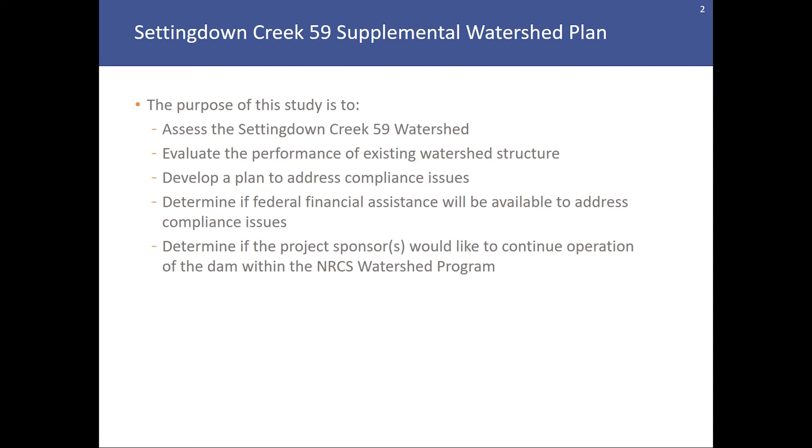This is the second public meeting held as part of the planning process for this dam. The purpose of the planning studies for the Settingdown Creek dams, including dam number 59, includes assessment of the watershed, evaluation of the existing structure's performance, development of plans to address compliance issues with the current dam, and determining if federal financial assistance will be available, as well as whether the project sponsor would like to continue operating the dam within the current NRCS watershed program.

As part of the planning study, a public participation plan is required to support the planning effort. The objective is to inform the public and watershed stakeholders of the planning effort. The planning study requires a series of public meetings. The first public meeting presentation included a brief history of the NRCS watershed program, a brief history of dam safety, considerations for dam design, operation, and maintenance, an overview of the Settingdown Creek watershed and specific dams included in this study, and solicitation of questions and comments based on scoping topics and identification of project opportunities and concerns.

This initial presentation was provided in August of 2020, but please note that it is also being reposted to Schnabel's YouTube channel to run concurrently with these second public meeting presentations. They will be available until early January for reviewing and comment.

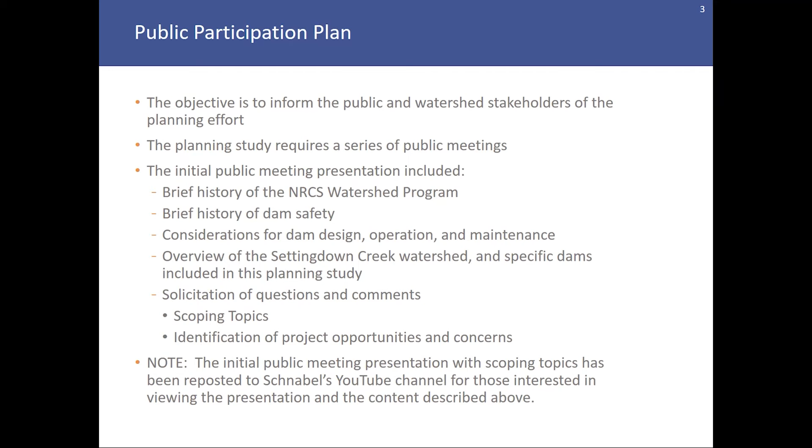This is the second presentation for this particular dam. In this presentation we will discuss the following topics: an overview of the Settingdown Creek watershed, the existing conditions associated with Settingdown Creek Dam number 59, and a discussion of rehabilitation alternatives under consideration for the dam.

At the end of the presentation, there will be an opportunity to click on a link to get to a Google form where questions and comments can be submitted by interested parties regarding the planning study for this dam.

Just a brief overview about the Settingdown Creek watershed. It is located in northern Forsyth County, Georgia. Settingdown Creek is a tributary of the Etowah River, which flows into the Coosa River near Rome, Georgia. The Settingdown Creek watershed contains over 34,000 acres of drainage area.

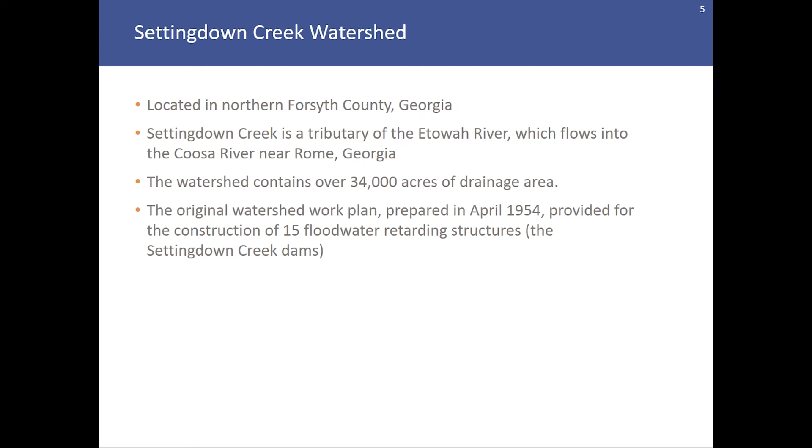The original watershed work plan, prepared in April 1954, provided for the construction of 15 floodwater retarding structures, also known as the Settingdown Creek dams. This study includes 6 of those structures, and this presentation focuses specifically on dam number 59.

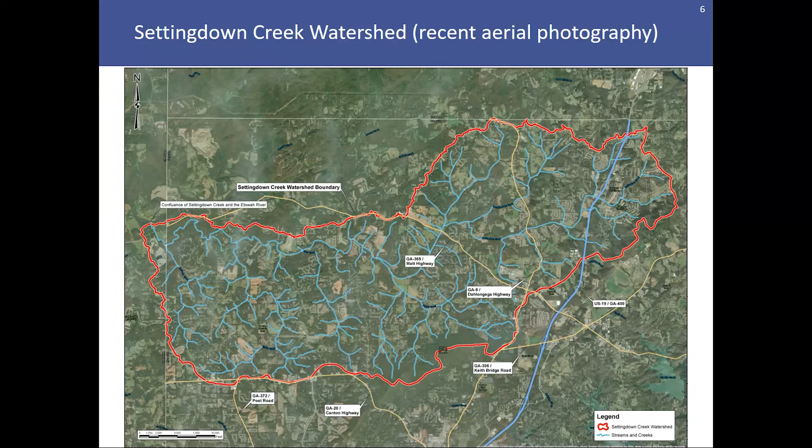This is aerial photography with the limits of the Settingdown Creek watershed shown in red. As you can see, there are some project area features, including US 19 or Georgia 400 noted near the right side of the view, as well as Keith Bridge Road, Dahlonega Highway, and Matt Highway, all major roadways in northern Forsyth providing context for where the Settingdown Creek watershed and dams are located.

As a reminder from the initial public meeting, the focal points of this analysis and study associated with the watershed are an analysis of the upstream areas, including flooding and additional storage capacity, evaluation of downstream areas for flooding associated with frequency storm events, as well as the breach zone were the dam to fail catastrophically. Also, the hydraulic capacity of the existing spillway outlet works was assessed for various storm events, including large storm events required by both the state of Georgia and the federal government.

The study will also include an evaluation of the economic and social benefits the dam currently provides, as well as an environmental assessment to identify potential species of note, wetlands and/or jurisdictional waters in the vicinity of the dams that would need to be considered during any rehabilitation. Finally, a cultural resources study has been performed to determine whether or not there are any items of historical significance associated with the dams prior to any rehabilitation.

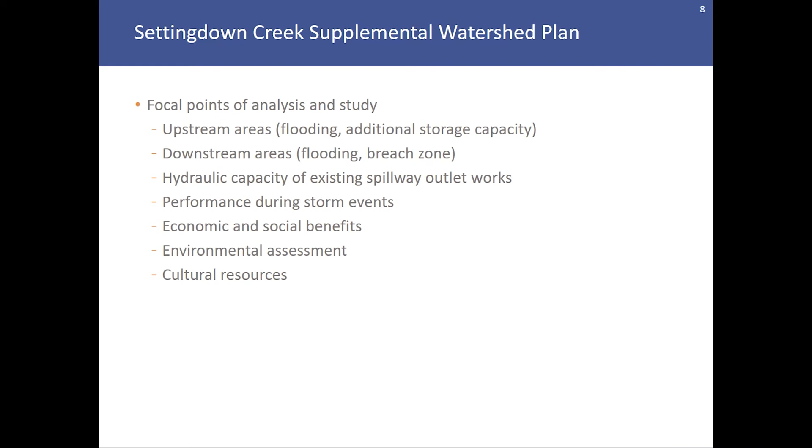Specifically talking about Settingdown Creek Dam number 59, the dam meets Georgia Safe Dam Program criteria to be considered a Category 1 high hazard dam. This means that failure or improper operation of the dam would likely result in the loss of human life.

The dam needs an operating permit from the SDP and currently does not have one. Previous assessments of this dam indicate that it does not comply with current SDP rules and regulations, and the dam is not exempt from these rules and regulations.

A purpose of the planning study is to determine if federal assistance will be available to bring the dam into compliance with current dam safety requirements. The Georgia Safe Dams Program is fully aware of this dam, its classification or pending classification as a high hazard dam, and that the dam is being studied by the planning team.

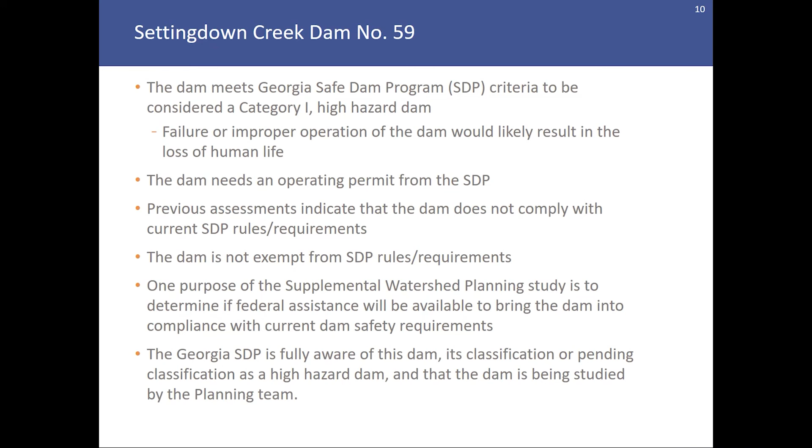Some original design features for dam number 59 include that it was not originally designed as a high hazard dam. The purpose of the dam was originally flood mitigation, and an anticipated secondary purpose was sediment accumulation and storage. The dam was originally designed and constructed with a reinforced concrete principal spillway, which consists of a riser structure in the lake.

The spillway includes a pipe or conduit through the earthen embankment to convey water from the lake downstream to the outlet channel or creek. The dam also includes a vegetated earthen auxiliary spillway, or emergency spillway channel, that would flow in the event of increased flows into the dam, so water would go around the dam and not over it, which could lead to its failure.

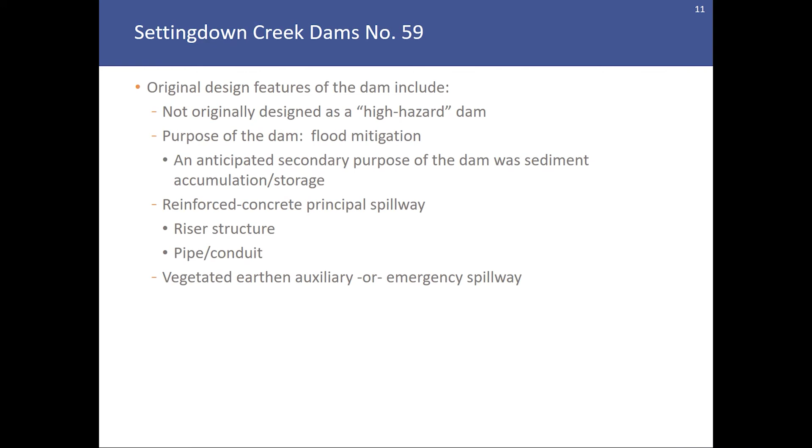Settingdown Creek Dam number 59 is located adjacent to the Hampton Golf Club, south of Glen Haven Drive. It was built in 1954, making it approximately 66 years old. The dam is currently 33 feet tall, with a drainage area of just about 1.8 square miles.

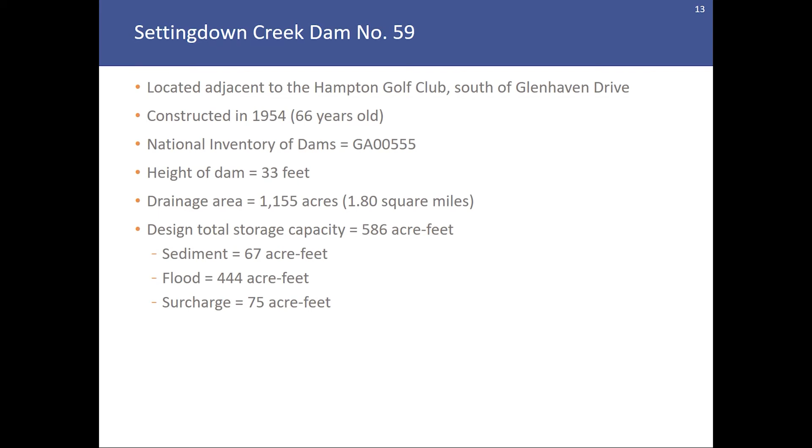The design storage capacity of the dam was 586 acre-feet, and that includes considerations for sediment accumulation, flood control, and surcharge above the auxiliary spillway.

Here's a 1956 aerial photo taken recently after the construction of the dam. As you can see, there's not much development. The golf course has not been constructed, nor the residential communities surrounding the lake.

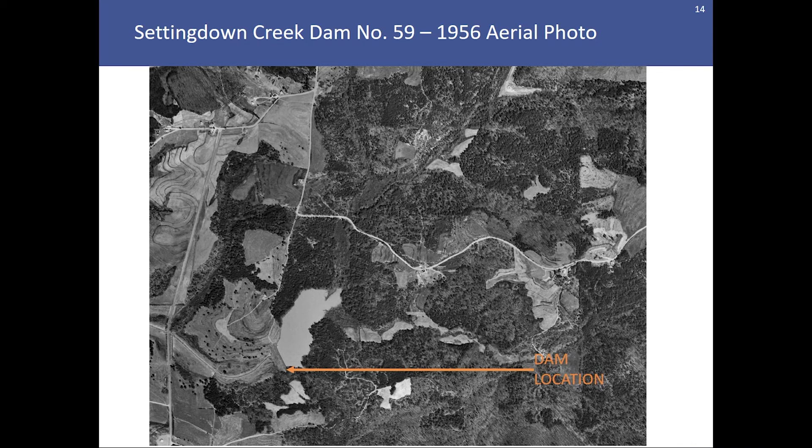Here's a more recent aerial photo that shows portions of the golf course and residential development around the lake. Also of note is the existence of a water treatment center just to the south of the dam. The dam also has a cart path associated with the golf course that traverses the crest of the dam and allows for crossing of the creek and lake from one side to the other.

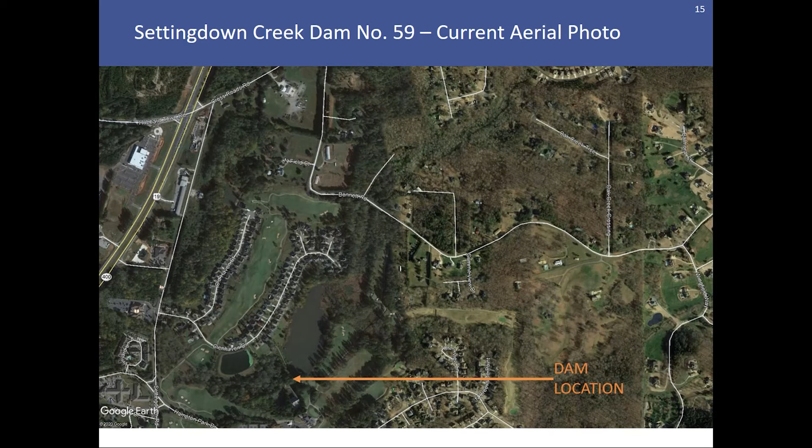This is an aerial photo taken to support a survey performed this past 2020 of the dam. You'll note that the dam was recently cleared prior to this photo, and the light brown or yellow areas on the embankment are places where straw and erosion control matting have been placed over the disturbed ground that resulted from the clearing of the dam.

The dam previously was covered in trees and other inappropriate vegetation, and the sponsoring local organization arranged to have the dam cleared in advance of these studies. As you can see, the lake is at the bottom of the screen.

Typically with dam engineering, this is the orientation of a dam that we follow. So as we move forward, you'll note that some of the maps with respect to the dam include the lake at the bottom with flow going up toward the top of the page. So upstream would be in the downward direction, and downstream would be at the top of the page in these cases.

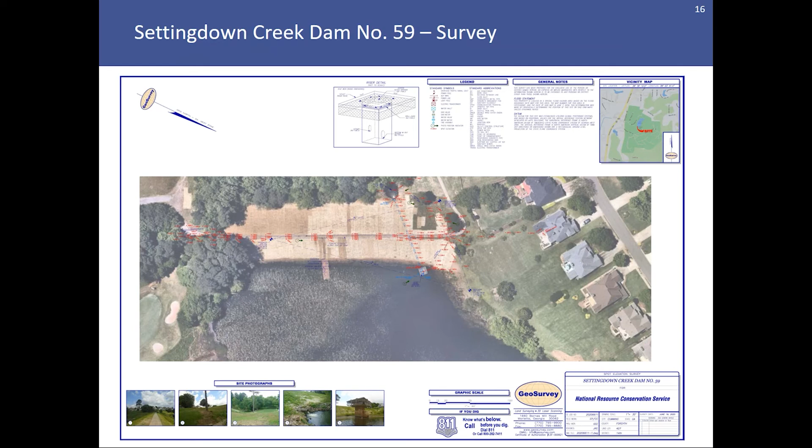This is a site plan using GIS topographic contour information. As you can see, it shows the location of the principal spillway, as well as the concrete path along the top of the dam. The water treatment facility is located to the left of this view, and you can see several residential properties located along the right side. The auxiliary spillway is located near the right side of this view, with a general alignment of that spillway channel also shown on the right side of this page.

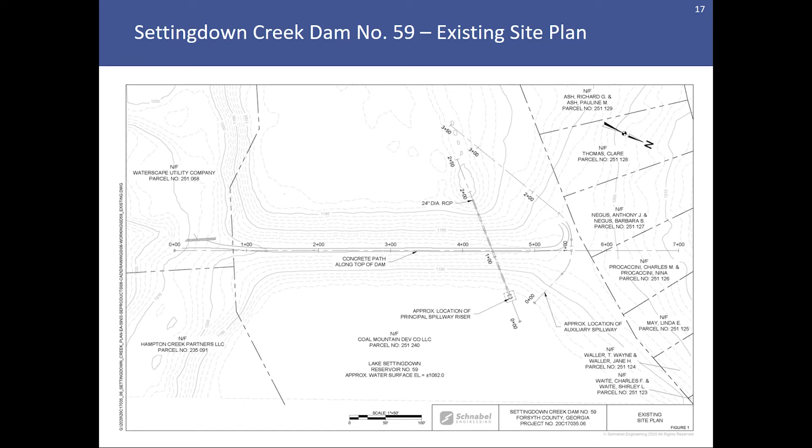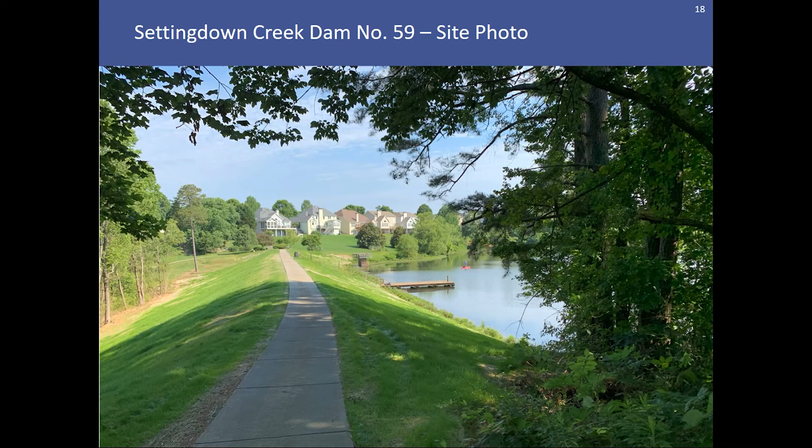Here's a photograph taken a few months ago of the dam after it's been cleared and the grass is reestablished. You can see in the background the residential homes. You can also see the concrete riser structure, the crest of the dam with the golf cart path going across it, and the upstream slope. There's also a dock that's been constructed on the upstream slope of the dam.

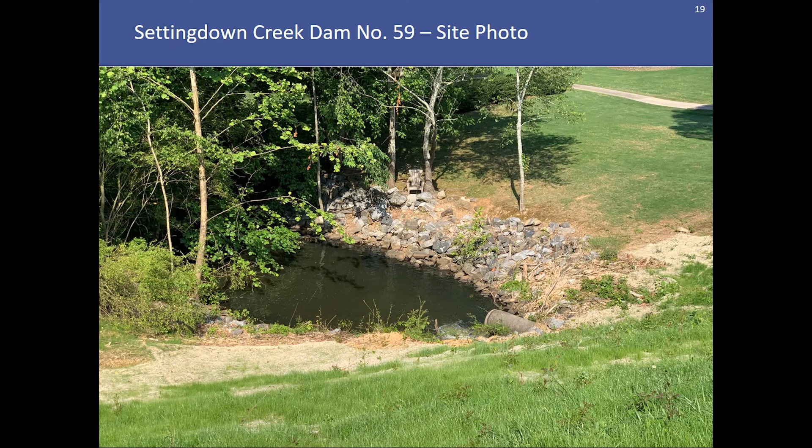The principal spillway conduit is indicated along with the plunge pool where water discharges, and the downstream slope.

As part of the planning study, an environmental survey has been performed for the dam and adjacent areas. During this survey, no protected species were identified. Some invasive species, predominantly Chinese privet, a vegetative species, were identified as indicated on the aquatic resource survey map shown on this slide.

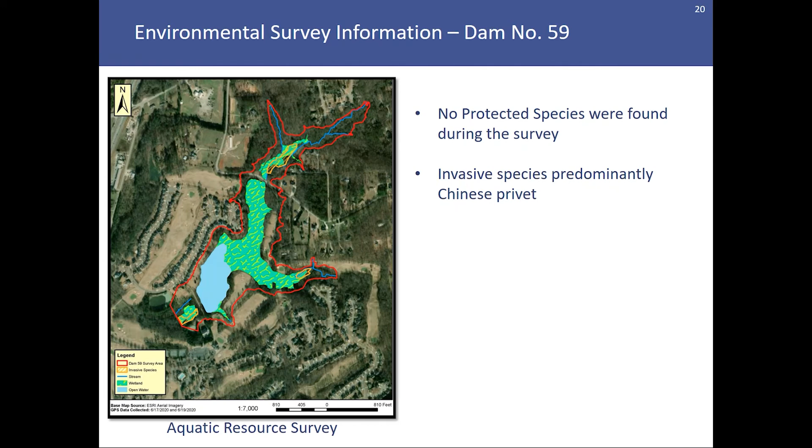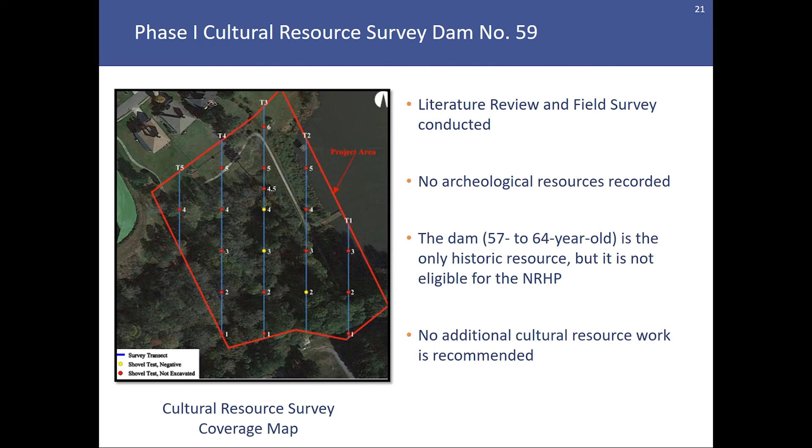Also, a Phase 1 cultural resources survey was performed for dam number 59. The survey included a literature review as well as field activities and shovel tests. No archaeological resources were recorded on this site. The dam, being in the range of 57 to 64 years old, is really the only historic resource, but it is not eligible for the National Register of Historic Places. No additional cultural resource work has been recommended by the team that performed the cultural resources survey for this dam.

Here is a breach inundation map and identification of downstream hazards. As indicated previously, this dam does meet the requirements as a Category 1 or high hazard dam, which means that if the dam were to fail, loss of life would be imminent or likely. The dam breach inundation limits shown on this map were derived based on a sunny day breach with the water surface at the top of the dam, which is a common and required configuration for a dam breach for both the Georgia Safe Dams program as well as the NRCS.

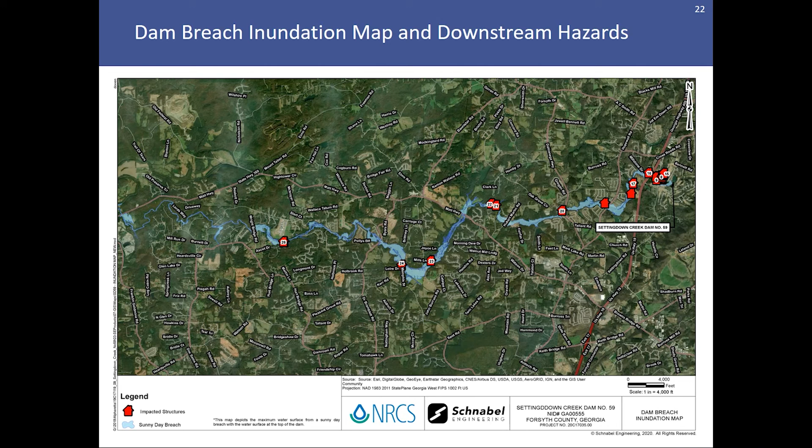This is a downstream flood analysis map that was developed by Schnabel. This particular map includes consideration for all areas within the Settingdown Creek watershed upstream of John Burris Road. The limits shown on this map indicate areas that would be flooded during both the 100-year and 500-year 24-hour storm events. Downstream flood analysis is an important part of the planning study as it allows the planning team to identify and quantify the benefits provided by the existing dam.

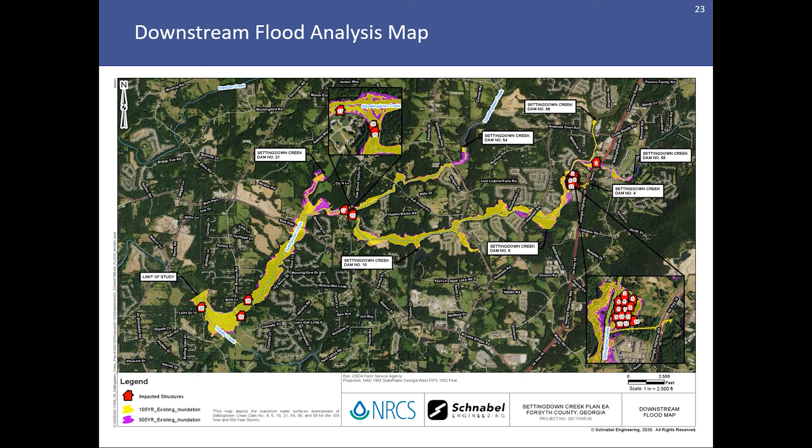This map indicates the upstream flood limits of the lake. Several storm events have been run through the lake and spillway outlet works, and in doing so, the planning team has been able to identify the water surface elevations associated with those events.

As you can see on the left side of this view, there's a legend that indicates the normal pool elevation of the lake, the elevations associated with the auxiliary spillway and dam crest, and also the storm event elevations—the water surface elevations associated with several storm events, including the 100-year storm, the 500-year storm, the Safe Dam Program Design Storm, which is currently the 1/3 probable maximum precipitation storm event, and the Freeboard Hydrograph Storm, which is the NRCS Design Storm event. The FBH, or Freeboard Hydrograph, represents 100% of the probable maximum precipitation in this area, which is generally around 30 to 32 inches of rain in a 6-hour period.

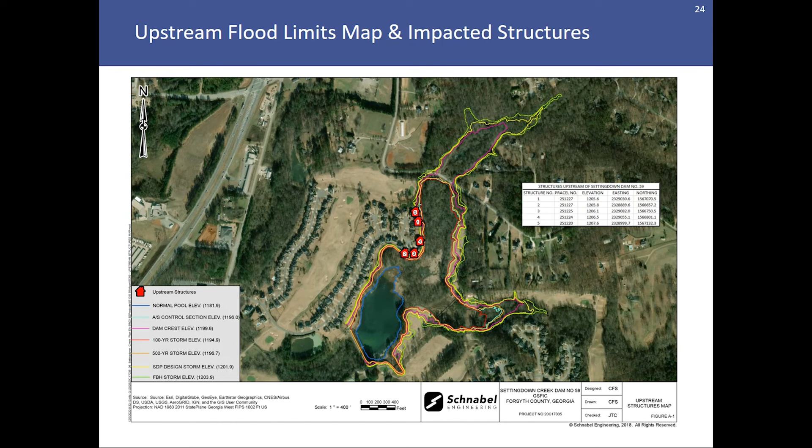Existing dam deficiencies: the dam was recently cleared during the summer of 2020. Previously, there was a lot of inappropriate vegetation and trees growing on the dam, and those trees and vegetation have since been removed, and the ground has been re-stabilized with an appropriate turf grass.

An underwater inspection of the riser structure by commercial divers concluded that portions of the slide gate assembly associated with the riser structure are worn and/or corroded. Portions of the riser concrete are cracked and/or spalled, which is not surprising given the age of the structure. A closed circuit television camera inspection of the principal spillway conduit is scheduled to be performed, and we are awaiting the results of that inspection.

Existing hydraulic deficiencies with the dam: based on Georgia Safe Dams Program criteria, the dam overtops by 1 foot during the design storm, which is not good, and also the auxiliary spillway breaches, meaning there would be enough flow that the earth spillway would erode to the point that the entire dam would fail.

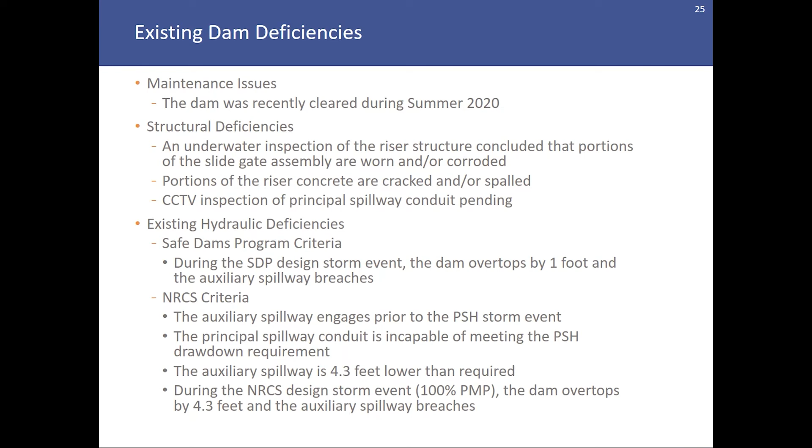The NRCS criteria that were assessed show the auxiliary spillway engages prior to the PSH storm event, the principal spillway hydrograph storm event. The principal spillway conduit is incapable of meeting the PSH drawdown requirement, and the auxiliary spillway is about 4.3 feet lower than required by NRCS requirements. During the NRCS design storm event, which is 100% of the PMP, the dam overtops by 4.3 feet and the auxiliary spillway breaches.

In order to address the compliance issues with the dam, the planning team has worked up several rehabilitation alternatives for consideration. The majority of the alternatives will be based on federal criteria, although we have looked at rehabilitating the dam to meet state criteria, which are a little less stringent than federal criteria.

The future without project, or no action, alternative would be instituted assuming that no federal financing would be available for the rehabilitation. As such, the dam rehabilitation would be paid for using state funding and would be performed such that the dam would be rehabilitated to meet Georgia Safe Dam's program criteria for a high hazard dam.

Another alternative being considered and evaluated is decommissioning of the dam. This involves removal of the earthen embankment, stabilization of the excavated channel and resulting lake bed, and could also require consideration for flood proofing or relocating downstream hazards. As stated earlier, the dam currently provides a level of flood protection to downstream areas, and removal of the dam will impact the benefits it provides.

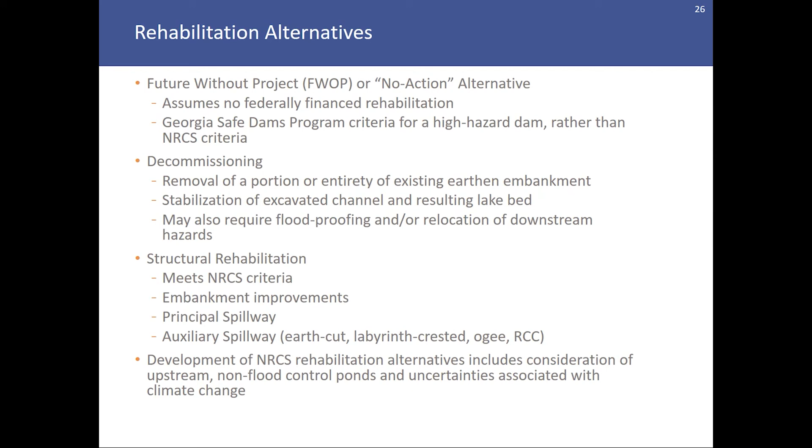The development of NRCS rehabilitation alternatives also includes consideration of ponds upstream of the dams that may not be designed to the same criteria as a flood control dam. The alternatives have also been developed considering the uncertainties associated with climate change and what rainfall events will look like over the next 50 to 100 years in this area.

The first alternative is the no action, or federal without project, alternative. This is the alternative that would bring the dam into compliance with state criteria. It would involve raising the crest of the dam to provide adequate freeboard during the design storm event, regrading the upstream and downstream slopes to a 3-to-1 slope to improve stability and maintenance, construction of a riprap lined wave berm along the upstream slope, and decommissioning of the existing auxiliary spillway by closing it off and making it part of the new embankment.

This alternative would also include construction of a new principal spillway riser structure, installation of a new principal spillway conduit, and construction of a riprap lined plunge pool at the downstream end of the conduit.

Finally, the auxiliary spillway for this dam would involve a reinforced concrete labyrinth crested chute spillway. The spillway would have a total width of 60 feet, composed of two 30-foot cycles, and would be constructed over the existing embankment. We've attempted to give consideration to maintaining access to both sides of the spillway from the dam crest.

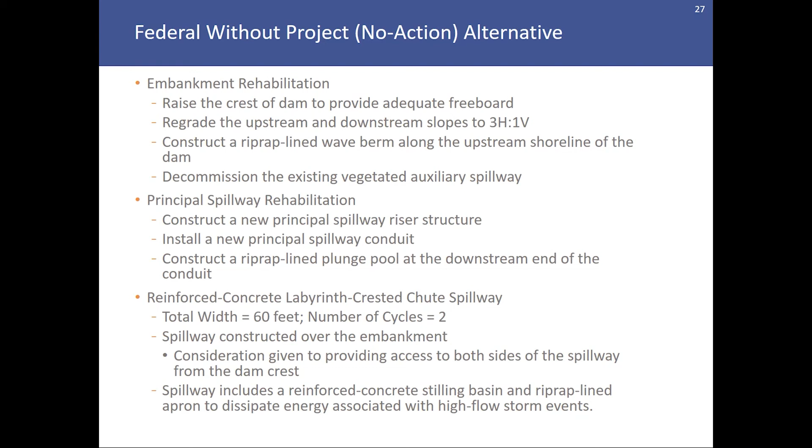The spillway would also include a reinforced concrete stilling basin and riprap lined apron to dissipate energy associated with high flow storm events.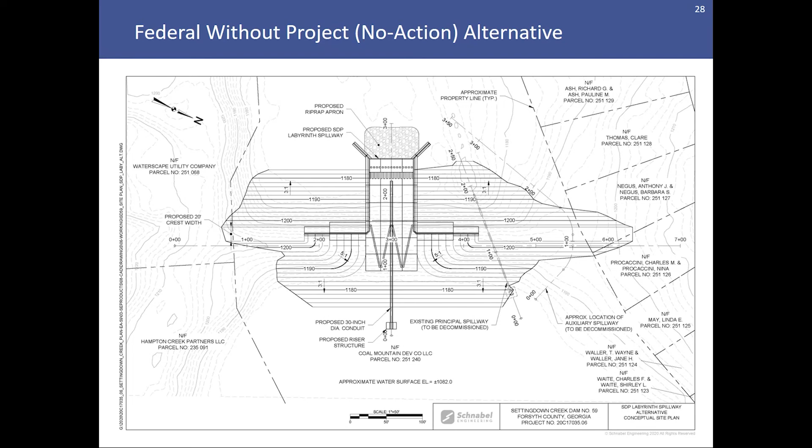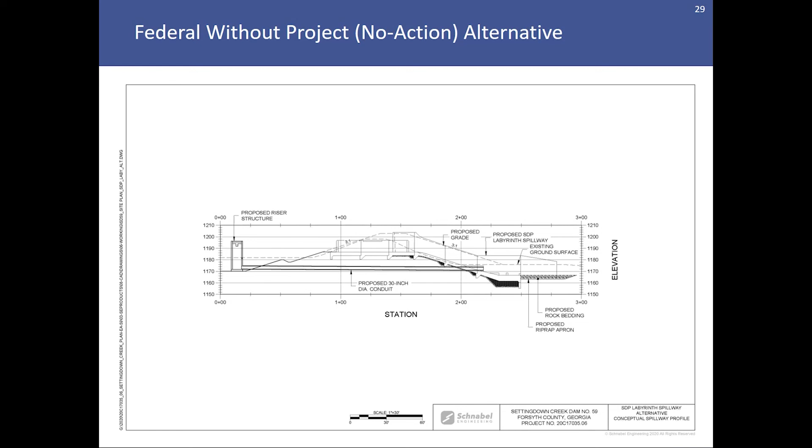The profile view of the labyrinth spillway. In this configuration, we are proposing to build the new pipe and riser along the same alignment as the concrete spillway. The pipe would discharge base flows and any flows related to very frequent storm events into the stilling basin, as indicated here.

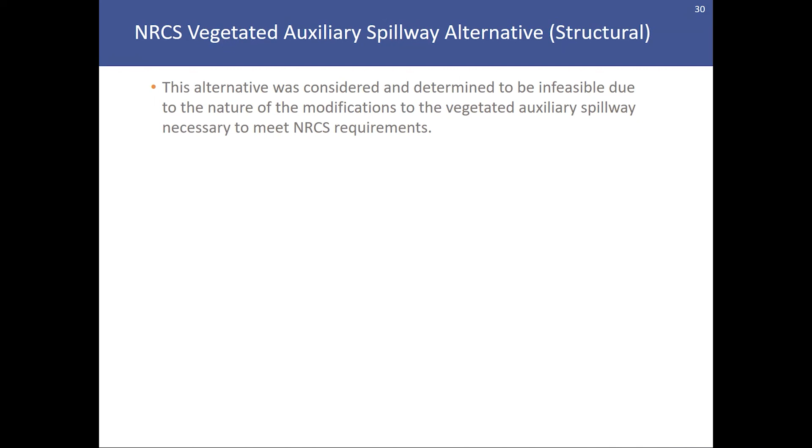Regarding the NRCS vegetated auxiliary spillway alternative, we considered this option but determined it to be infeasible due to the nature of the modifications required. Typically, the NRCS requires that the auxiliary spillway be raised, and the materials evaluated were relatively erodible. So while consideration was given to this alternative, it was determined to not be feasible on its own.

As part of the planning study, we also have to look at a decommissioning alternative, which would involve reconfiguring the existing structure so that it would no longer be classified as a dam. This process is more involved than simply breaching the dam, and would involve removal of most or all of the existing dam, reconnecting the grade of the original floodplain, stabilizing the resulting lakebed with permanent vegetation, and stabilizing the primary channel through the footprint of the old dam with riprap. While decommissioning the structure would improve flooding upstream of the dam, the downstream flood benefits provided by the dam would be lessened. The planning team is evaluating and quantifying the downstream benefits currently provided by the dam, as well as the loss of those benefits were the dam to be removed.

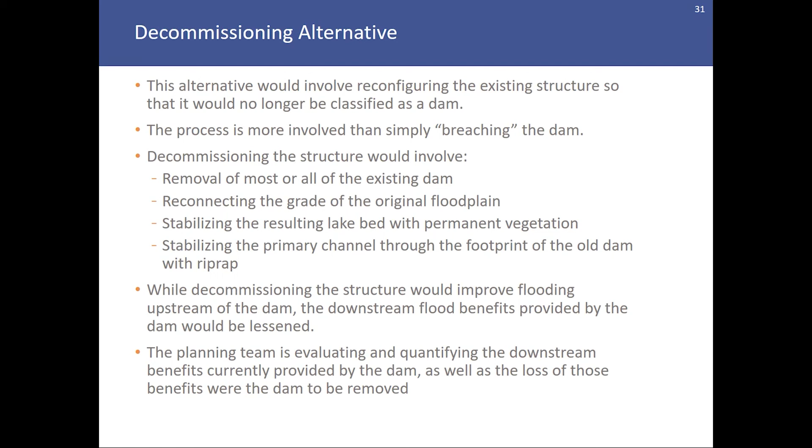Here's a plan view of what it would look like to remove the dam. You can see that we've attempted to reconnect the floodplain based on the original contour before the dam's construction. As part of this decommissioning, the portion of the lake that used to have water in it would be exposed. It would need to be stabilized with vegetation and likely returned to a wetland state. The portion of the original stream channel that runs through the dam, near where the existing principal spillway is located, would be lined with riprap.

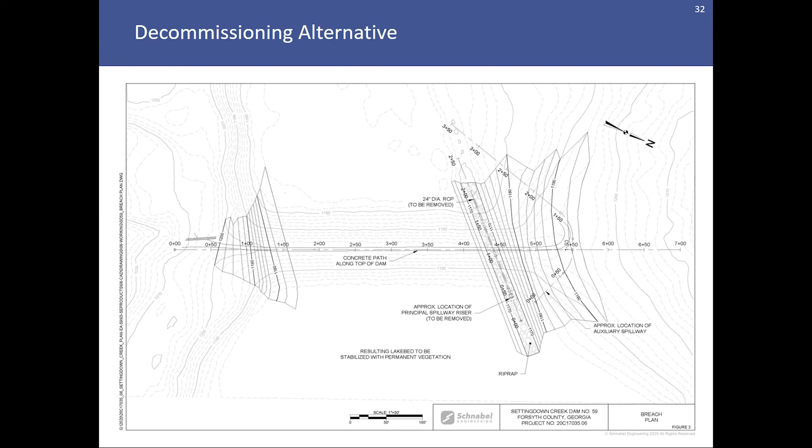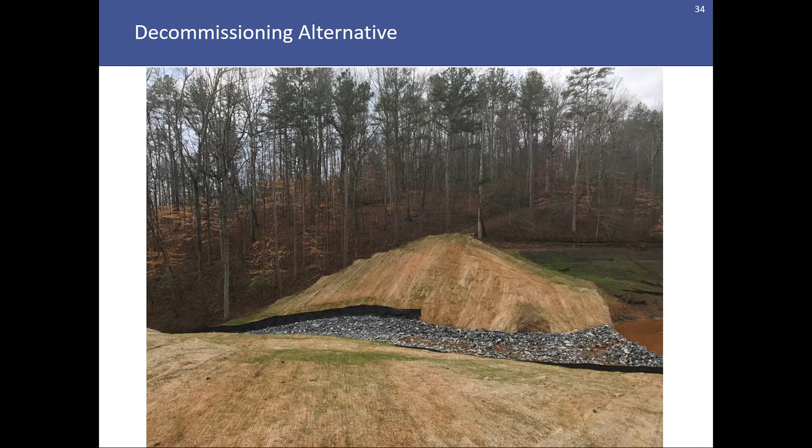The first of the two NRCS structural alternatives we'll discuss is the labyrinth spillway alternative. Similar to the Safe Dams Program rehabilitation, the existing embankment will be raised to the current maximum water surface elevation associated with the design storm. The upstream and downstream slopes will be flattened or regraded to 3:1. A riprap-lined wave berm would be constructed along the upstream shoreline, and the existing vegetated auxiliary spillway would be decommissioned or closed off with embankment fill.

This alternative includes a new principal spillway and plunge pool, and the reinforced concrete labyrinth-crested chute spillway would be 136 feet wide to pass the design storm, composed of 4 cycles of equal width. Consideration has been given to providing access to both sides of the spillway from the dam, and the spillway would include a stilling basin and riprap-lined apron to dissipate energy associated with high-flow storm events.

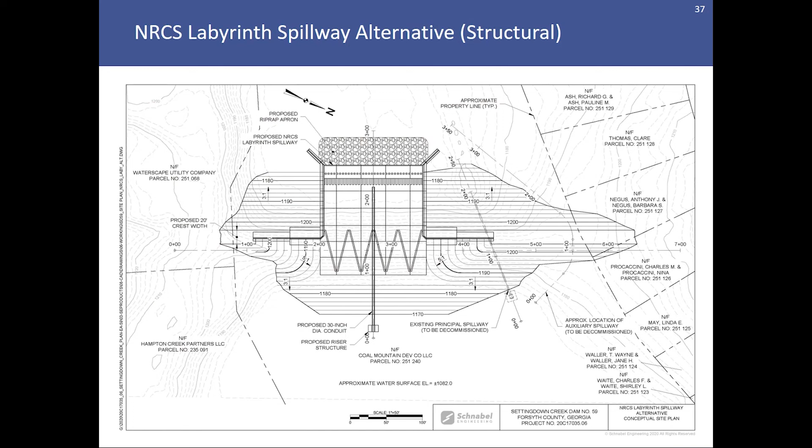Here's a site plan of the NRCS labyrinth alternative. As you can see, it's larger than the SDP labyrinth because the design storm is larger, and we would have to pass a higher amount of rainfall through this spillway without allowing the dam to overtop. The dam crest is slightly higher as well, due to storage requirements, and you can see that the existing principal spillway would be decommissioned, with a new principal spillway constructed to discharge into the stilling basin for the labyrinth spillway.

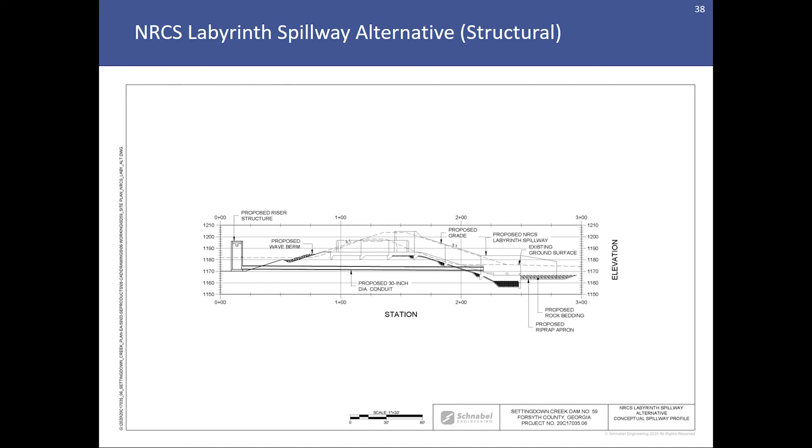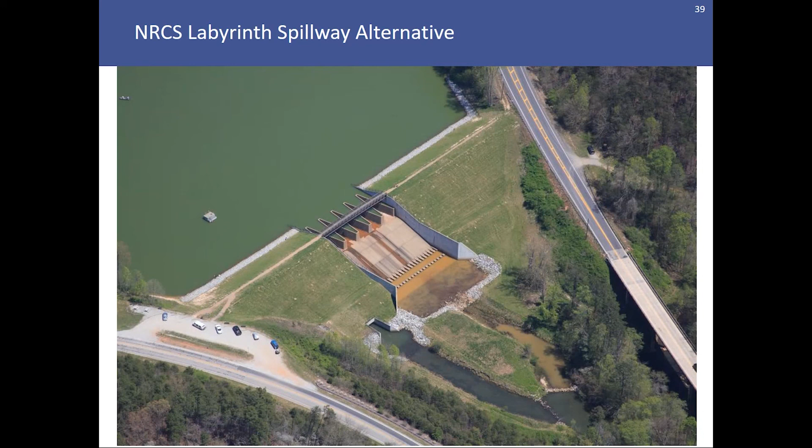Here's another example of a spillway. This spillway includes the principal spillway, similar to what we've proposed for dam number 59, where the new pipe and riser would be configured to work in conjunction with the outlet works of the labyrinth spillway.

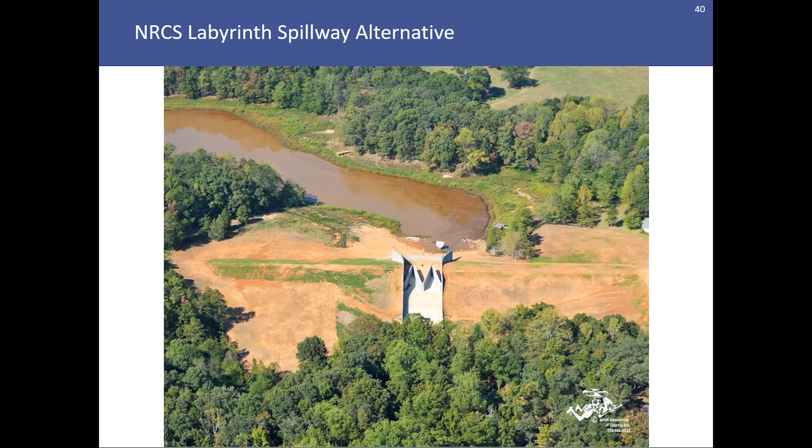The final structural alternative that we'll discuss today is the NRCS RCC spillway. Similar modifications to the embankment and principal spillway as were described for the labyrinth alternative. Instead of a labyrinth spillway, this spillway would be constructed of roller compacted concrete in a stepped configuration, and it would have an ogee crest, or a rounded crest, to improve the efficiency of flow over that weir.

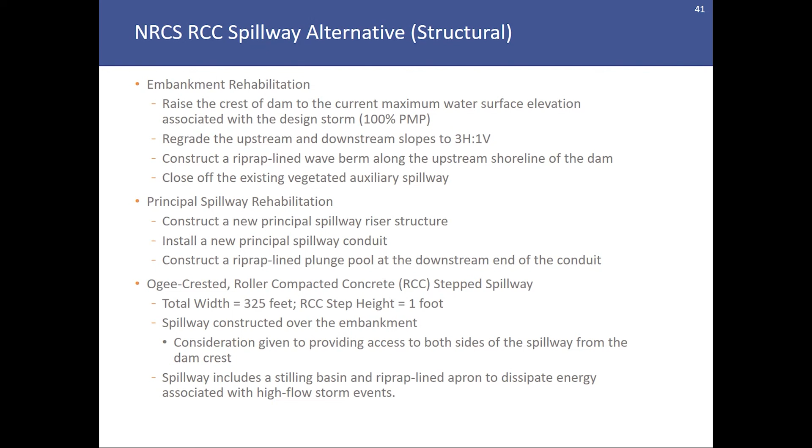The total width required for this particular spillway configuration is 325 feet. The RCC steps would have a height of 1 foot. The spillway would be constructed over the embankment, similar to the labyrinth, and would also include a stilling basin and riprap to dissipate the energy.

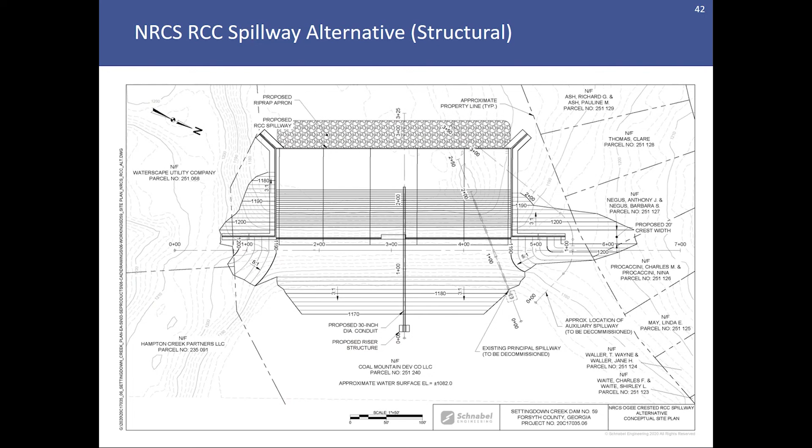This is a plan view of the RCC alternative that would be necessary to pass the NRCS design storm event. As you can see, it's a wider footprint than the labyrinth. There would be steps and a stilling basin. We would be able to construct the new principal spillway in a similar configuration, and we would decommission the existing principal spillway during the construction activities for this alternative.

Here's a profile view of the RCC spillway. You can see that the crest includes the ogee, or a rounded crest, that improves the hydraulic performance of the weir. You can also see the steps on the 3-to-1 slope and sidewalls that would be used to contain the flows were this spillway to engage during a larger storm event.

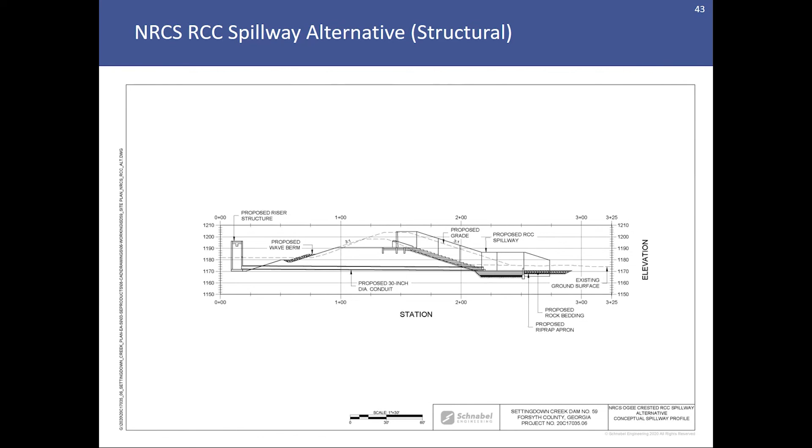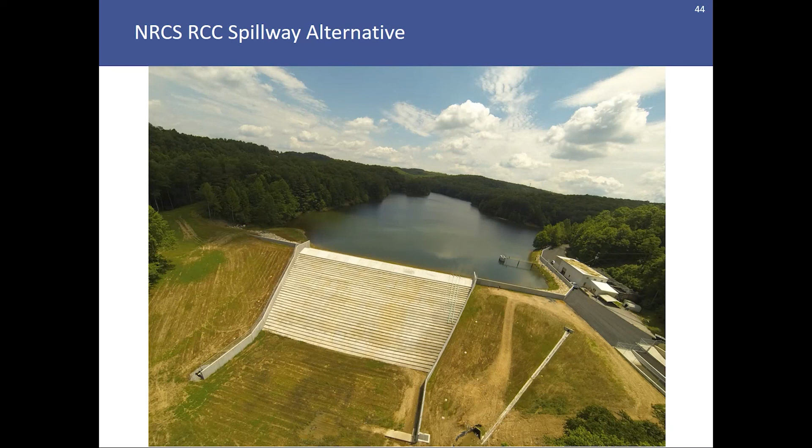Also included some photographs of example spillways like an RCC spillway. This spillway has a broad crested weir, but you can see that there are opportunities to place fill and grow grass in the outlet channel. Since these spillways do not frequently flow and would flow in excess of events of the 100-year storm and maybe even the 500-year storm, there are a lot of our clients and owners of RCC spillways that prefer to cover up the steps and grow grass for maintenance reasons.

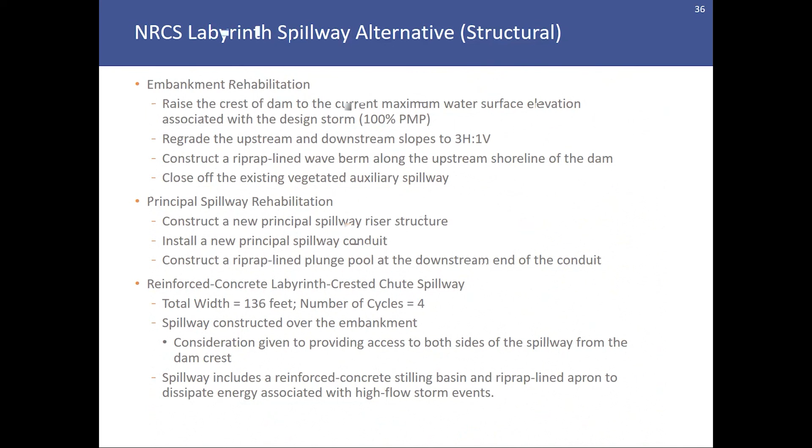Here's another example where the spillway was constructed over the embankment. This one does have an ogee crest, and this spillway includes the placement of topsoil and vegetation all the way up to the crest of the dam.

Here's a good view of what an ogee crested spillway looks like. You can see that the top is slightly rounded to improve the hydraulic performance of this particular weir.

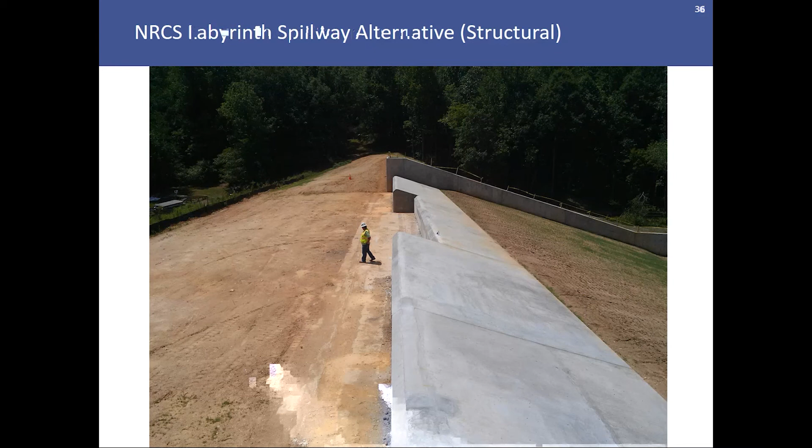And here's one more view of a spillway that includes some consideration for covering the steps with topsoil and vegetation. This one was taken while construction was ongoing and the vegetation hasn't fully established, but over the course of a few months, the vegetation will take and improve the sightliness of these types of spillways.